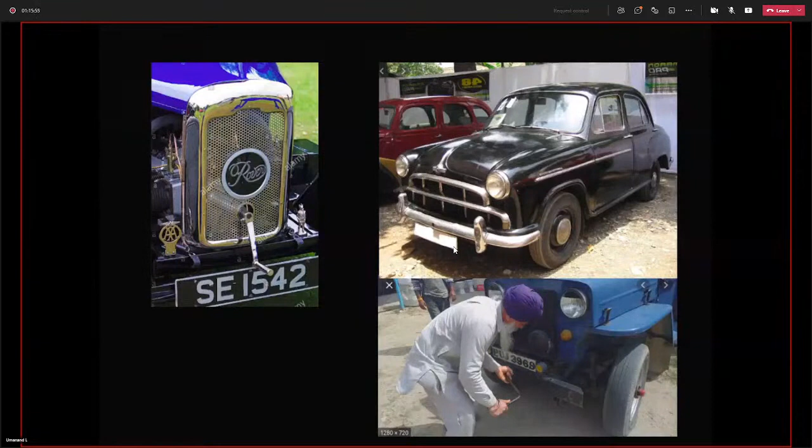But of course, after the starter motor came in, they used to have the crank in parallel, because sometimes the battery is down, you start it with this, something equivalent to a push start, crank it and then start the vehicle and go. But now it is not there. Remember that it is the starter motor which actually won the race for the ICE engine. Very ironical.

Then later on in the 40s or so, you started having these electric vehicles, wedge-shaped electric vehicles with different structures. They had the solar panel on the roof, and these wedge-shaped structures became popular basically again for aerodynamics.

In electric vehicles, you have these main loads. One is the resistance to acceleration, the J d omega by dt, or the m dv by dt - you need to provide enough force to overcome the acceleration. You need to overcome the rolling resistance - the tires which come in contact with the ground, by virtue of its motion, there will be a friction, called the rolling friction or rolling resistance, and it has to overcome that. It has to overcome any gradient forces. And third, important thing, it has to overcome the force of the opposing air, the air resistance.

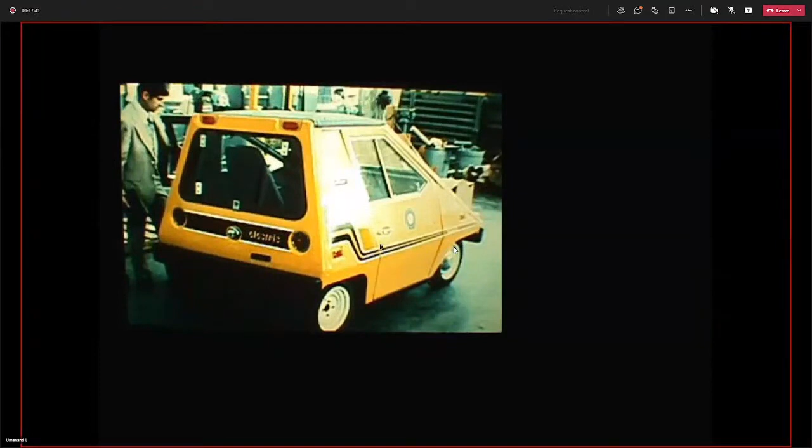So air resistance is actually proportional to the square of the velocity at which you are traveling. Therefore, the air force is quite significant at higher speeds. So these wedge-shaped structures started coming in.

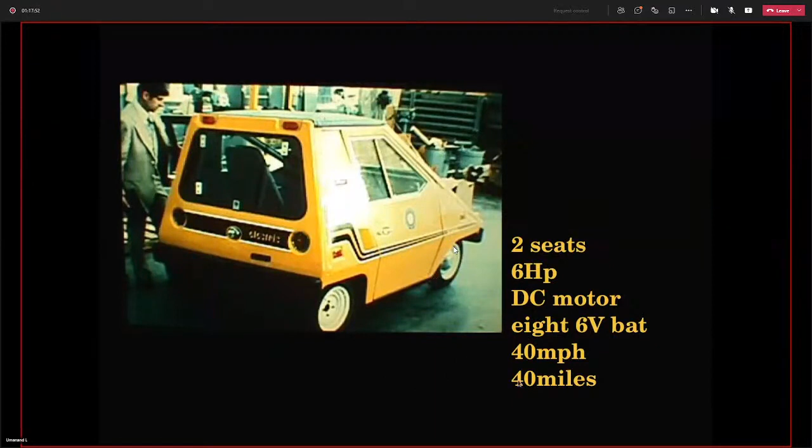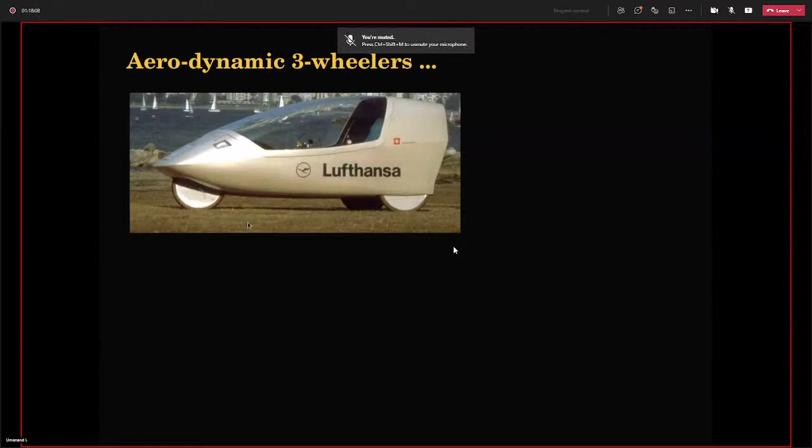This specifically is a two-seater 6 HP DC motor, which could have a range of around 40 miles at 40 miles per hour. You see that there are several in Europe also - several aerodynamic structures started coming into play. These are in that 1950s era.

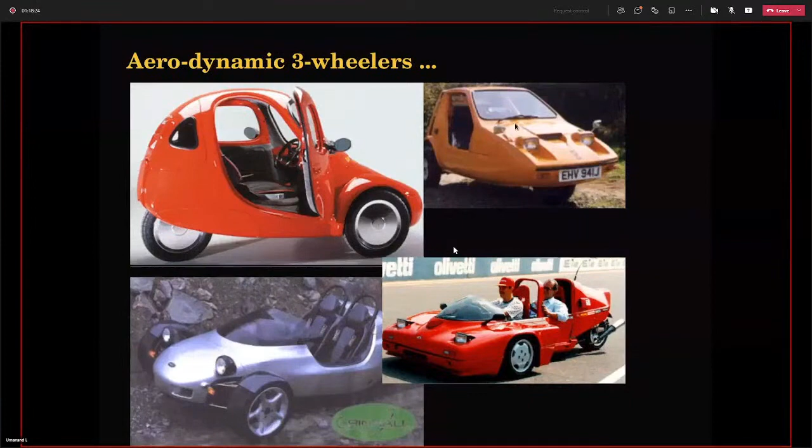And charging was an issue at that time, and it is also at this time. Charging, as we go forward in our discussion, you will see is going to be quite problematic. So instead of the fuel here, you will have the charges, and then you can have metered charges, all those things. So parking lots, parking spaces, can double as charging stations.

Now let us just have a look at this thing. Where does the energy go? So these numbers were actually taken from measurements - we have made several electric vehicles, probably I'll show some demos later, some videos. And the measurement taken for 1 kilometer travel, with the weight of the vehicle around 800 kgs, 800 to 1000 kgs if you include the payload - you will see for 1 kilometer cruising travel, the amount of energy that is consumed is around 80 watt hours.

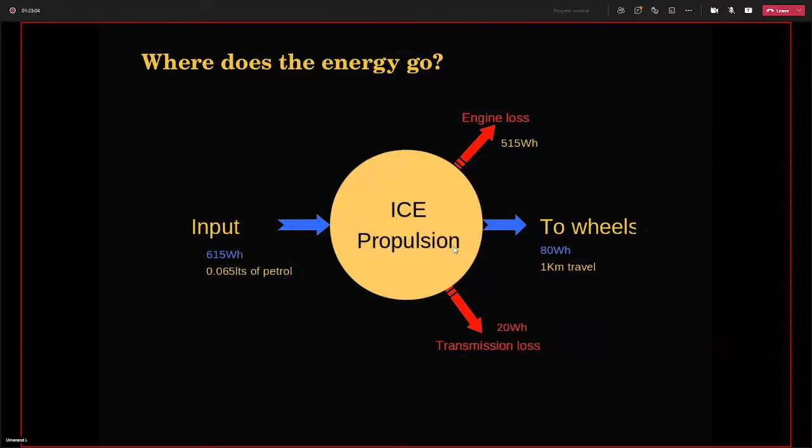So in liters of petrol, you can convert it, it will work out to this much. So this is basically the energy budget - what happens. This is the energy budget for an internal combustion engine propulsion. So let us see what happens if it is an electric propulsion. For the electric propulsion, same weight, same payload - 1000 kg, 800 kg vehicle, around 200 kg of payload, 1 kilometer travel.

This will not change, 80 watt hours. That will be still the same because the payload is the same, the weight of the vehicle is the same. So to that, add the commission given battery charging loss 40 watt hours, transmission 20 watt hours, and that will amount to 144 watt hours.

There is regeneration. So when you are using electric propulsion, you can regenerate. See, normally in an ICE vehicle, when you brake, what happens? There are these brake shoes which will go and press against the brake drum. There is friction, and because of the friction, the vehicle comes to a stop. That is an additional force. The vehicle slows down, decelerates, and comes to a stop. And where does the energy which is stored in the inertia of the whole vehicle payload go? It goes off as heat energy through that friction.

But in the case of electric propulsion, that energy which is stored in the mass of the vehicle, mass of the payload, can be regenerated back and put into the battery, into the input. So therefore, it is actually not 144, it will be around 140. So this is the kind of difference. So the energy that is drawn from the input can actually be significantly lesser compared to the ICE under same benchmark condition.

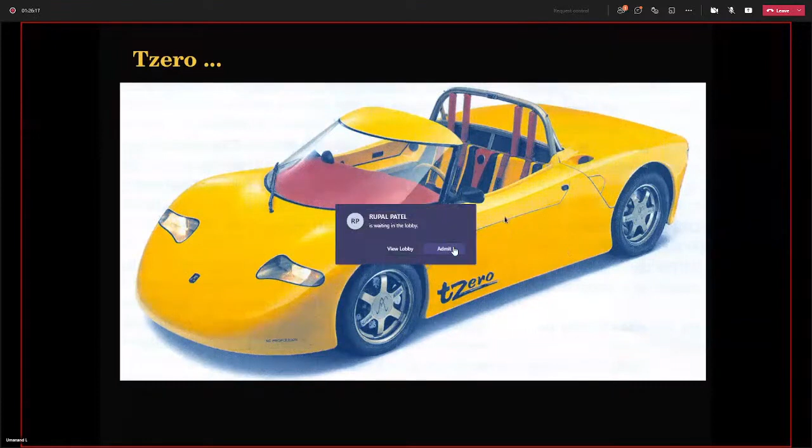I will explain the structure, the block diagram structure of that later.

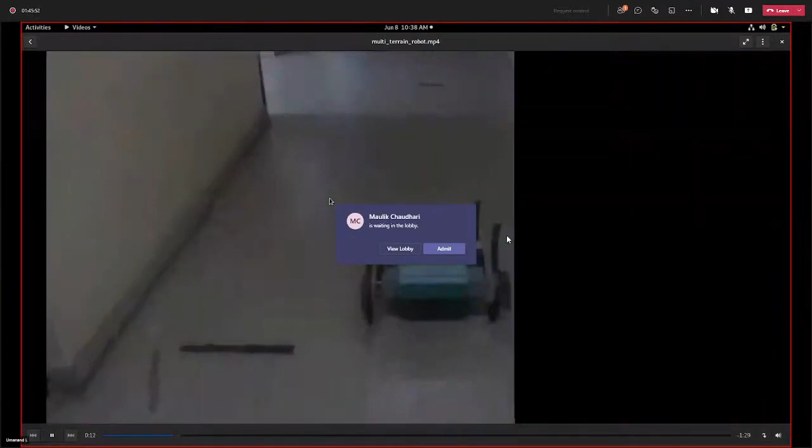Let me show you the next version. So this is the next version. You see that there is a camera there. So this can work on its own, and it can also sense obstructions.

See what's happening, and you can also direct it. So this is a stair climbing robot.

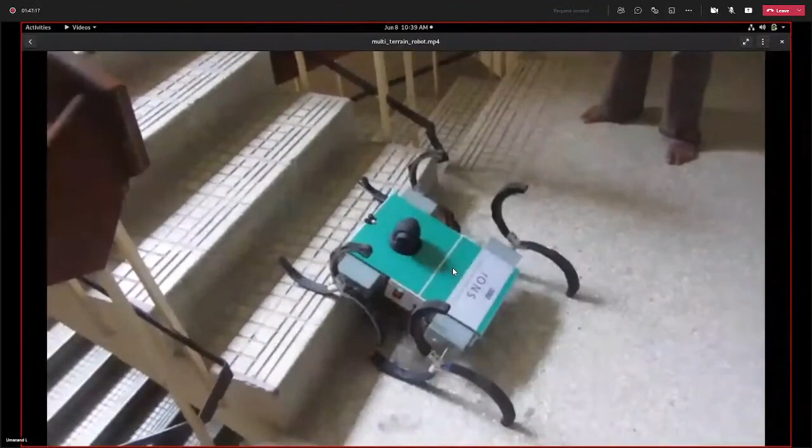This stair climbing, in fact, it was also supposed to not only be all terrain, but also be able to climb stairs. Then it comes down, all by itself. So this is basically one aspect of non-wheeled locomotion, very, very useful.

So when you guys are doing research, that...

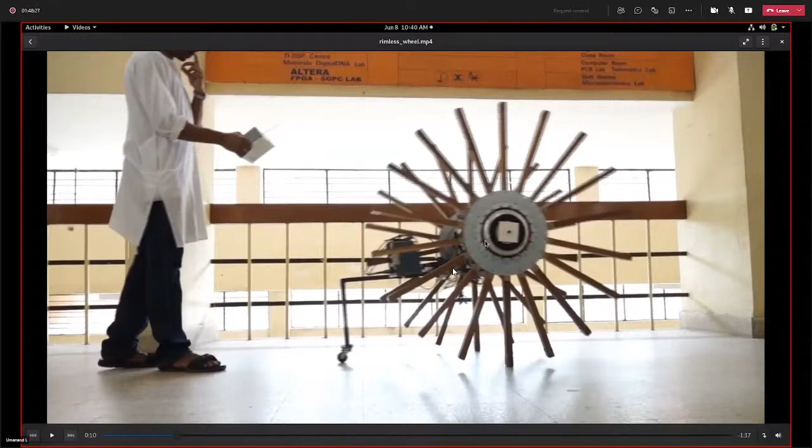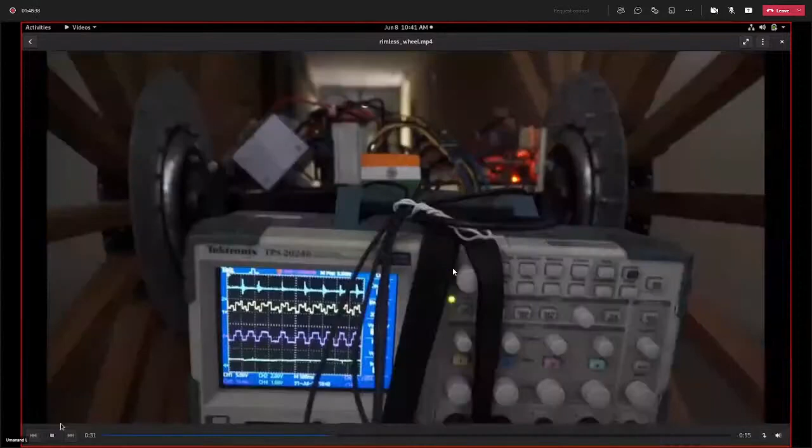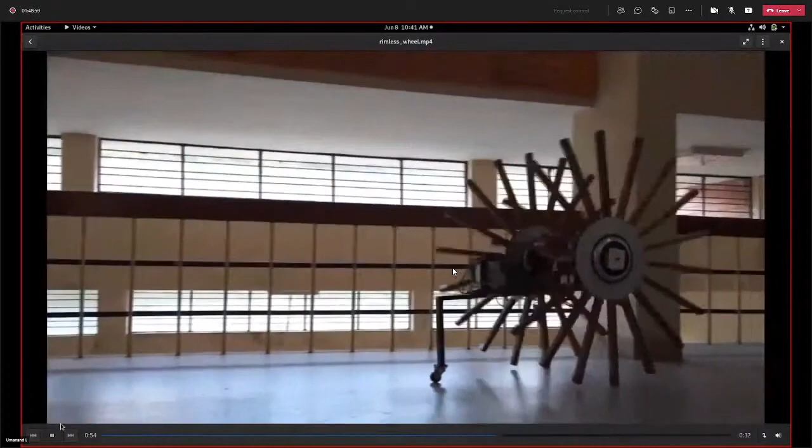This is very similar to your differential drive robot, that kind of a thing, where the differential is basically those two motors itself, operating at different speeds can give you the turning angle, turning radius.

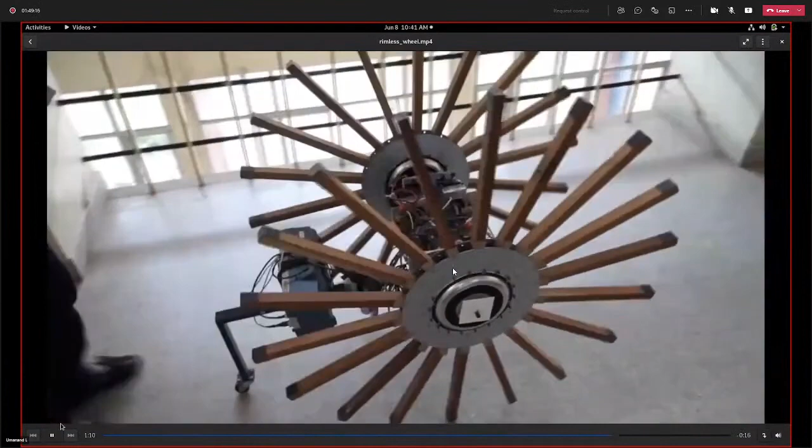This is a rim, the spokes are all made of wood. So we bought these wooden strips and then cut them to shape. And there is some rubber for the feet, rubber anchors for reducing the impact.

Okay, so that is some videos for you. I will close this presentation. I will open another, now this is something else.

Now at this point, let me ask, are there any questions before I go forward? Does anybody have questions till now? No, sir. Okay, let me go forward. If you have questions anytime, note it down so we can take it later, no problem.

So what I want to actually bring out in this slide, you have various energy sources. On the left column and on the right column, you have energy density, watt hour per kg, per kg of this energy source, how much watt hours you get. Look at these.

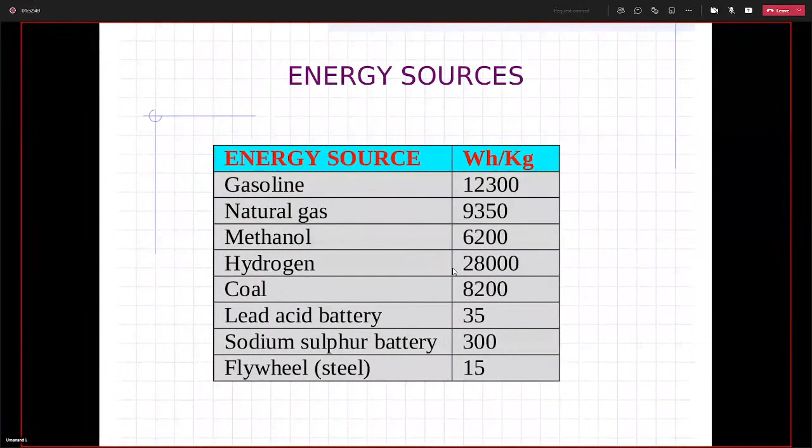So the 1 kg, if I take it in my pocket, the petrol will give you phenomenal range, whereas all these batteries will give you a very short range. This is one important thing that you need to keep in mind. Looking at hydrogen, the 28,000 figure is the one which actually pushed the fuel cell concept, which uses hydrogen for making energy. But one thing you have to keep in mind is that if you are carrying hydrogen, even though it's low...

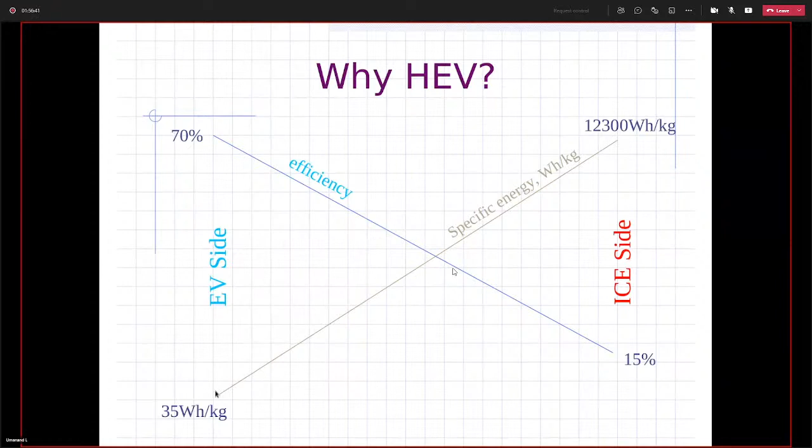So somewhere in between you can have a kind of optimal compromise. If you take the energy density into efficiency product, somewhere in between you can have the optimal compromise, and that could be the percentage. And then probably as and when the battery technology improves, you can start moving towards the EV side more and more until you become fully an electric vehicle, or you reach an equilibrium where you may have to use a portion of fossil fuel and a portion of electric to balance out in the long run.

Remember that when you are talking of this energy, you have to actually talk of the entire energy chain, from the point that if I take petrol, the amount of energy used to extract the petrol from the ground up, and then transport it to the various petrol stations, and from the petrol station it gets into the vehicle. So the energy chain, even from the generation point to the point of reaching the vehicle, is important.

In the case of electric, it is so as well. Is it renewable or is it non-renewable? In a country like ours, you should know that majority of the electricity is coming from... any guesses, anybody? Which is the major source of electricity for our country?

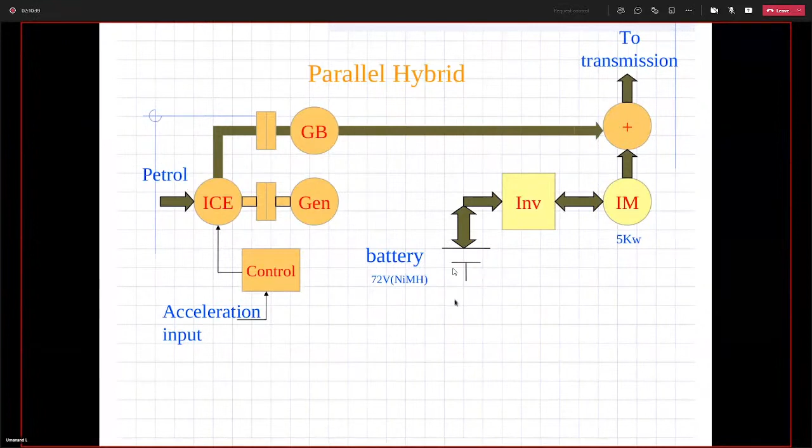And this induction motor is driven from an inverter, from the battery. So this is a combination: one input, petrol, coming into the internal combustion engine coupled to the gearbox, power flowing, and then here you have a torque addition. So battery powers up the induction motor through an inverter drive, and the induction motor goes to the torque adder. It's like two persons pushing the vehicle, these two persons pushing the vehicle wheels. So this is parallel - two persons in parallel pushing the vehicle, the parallel hybrid.

So let me just expand that. I will put the battery a bit downstream, and then you have an interface electronic.

So we have this multi power port. What it basically does is give you three power ports. One is electricity, that's one power port. You have the battery, that's another power port, and then the inverter, which is the third power port in this case.

So you could have electricity from the grid, from whichever socket point you want to take, that can power up the battery. Now from the battery, you can have the power flow through the multi-power port, and it can go into the inverter, into the induction motor, back and into the wheels.

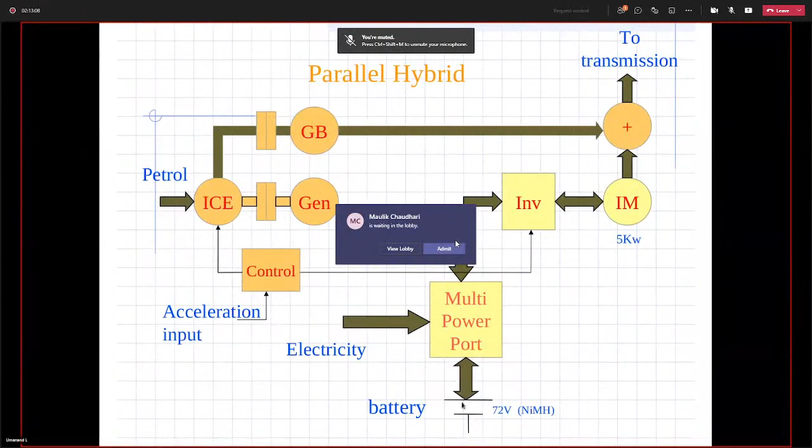But you can recover it back if you have this kind of hybrid. You pass it back to the induction motor, which will now act as an induction generator, goes through the inverter, and through this multi-power port, it will come and charge up this battery. You can recover that portion of the energy which was in the inertia of the vehicle. So that is the important aspect, energy recovery, which is not there in normal petrol driven vehicles, which is possible here. So we call it regeneration. This is parallel hybrid with regeneration possibility.

Okay, so you see the difference now. I am removing this shaft. From the ICE engine, the direct shaft which is connecting to the torque adder is removed. Instead, the ICE engine shaft is connected, coupled to a generator. So the generator is going to generate electric output. The electric output, let's say if it's AC, it's an alternator, you rectify it, and then you place it in this fashion. So this becomes a series hybrid.

This means only one guy is pushing the wheels, which is the induction motor. But the induction motor itself can take power, energy, from different energy sources. It can take from the petrol ICE engine, that's one possible source. It can take from the battery, the other possible source. And it could take from the battery, which is actually taking from the electricity. So multiple sources are there. But as far as pushing the vehicle is concerned, it is one single fellow which is pushing the vehicle, the induction motor. So the entire torque has to come from the induction machine.

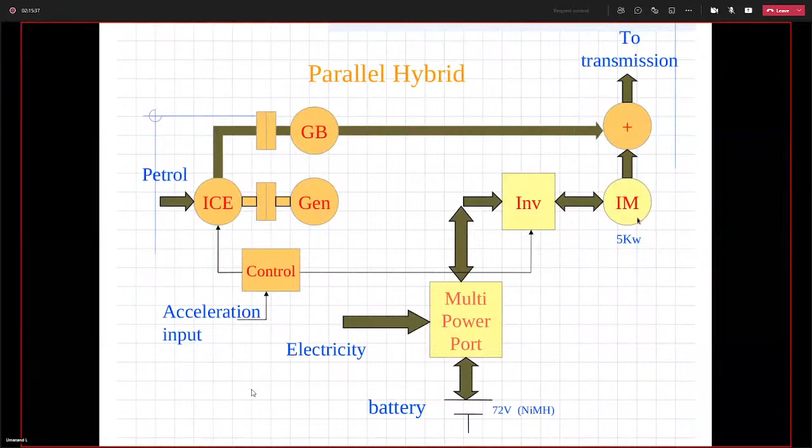So if they are equally rated - if the ICE engine, let's say you have totally 10 kilowatts, you rate this as 5 kilowatts and you rate the ICE engine as 5 kilowatts - then you have half the torque coming from here and half the torque coming from the induction machine. So you can rate the machines half and half. But in the series hybrid, this motor has to handle the entire power, so it has to be rated for the full 5 kilowatts - the vehicle will be a 5 kilowatt vehicle, not a 10 kilowatt vehicle.

And this induction machine can take part power from the ICE engine. The ICE engine can still be half the rating and the battery can be half the rating. And then this part of the block diagram can be half the rating compared to this. The inverter has to be the full rating, the induction motor has to be the full rating. So this is a hybrid concept - series hybrid.

So that vehicle which I showed, that we made, the three-wheeler vehicle, was a series hybrid. This was the topology that was used inside that vehicle.

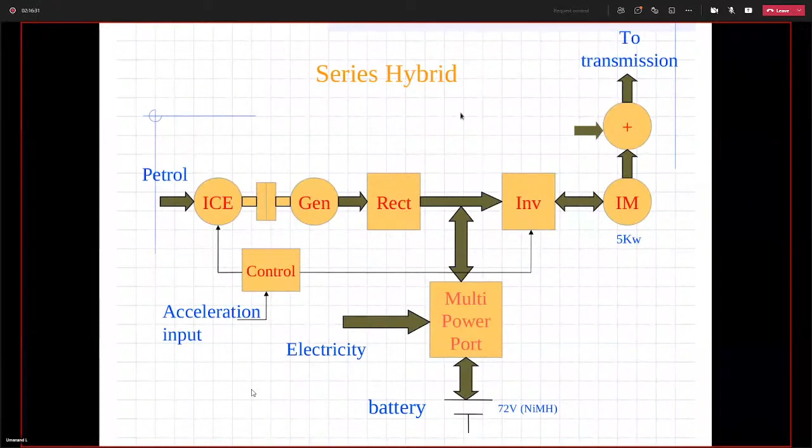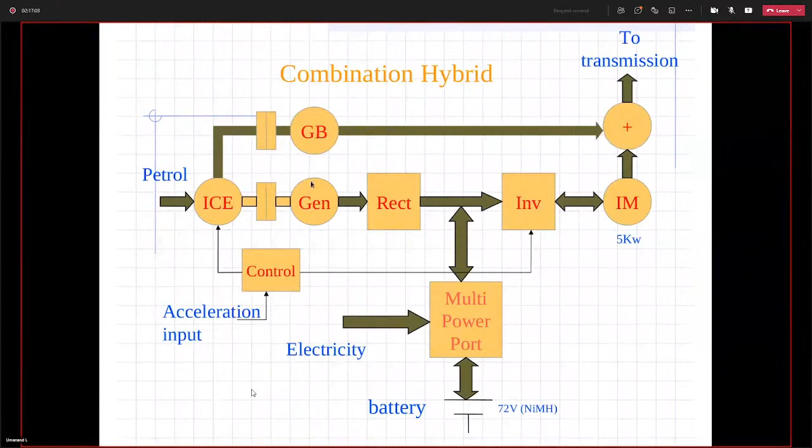So both I will use series and parallel, which means I can shift between series, parallel, combination in a very smooth manner. This is called combination hybrid. This is exactly what is inside the Prius - the Toyota Prius is a combination hybrid. Their nice important component is this: the ICE shaft has a generator and you have the gearbox. This is a very nice combination which Prius uses as a sun and planetary gear system. It is their patented technology, and that is where a lot of their innovative USP is about.

Okay, where you also have torque sharing at the wheels. You also have power sharing at the electrical side. So you can see that you can have several directions of power flow here.

Petrol, the power can flow from the ICE engine. It can go through this generator, gets converted to electrical, rectify, charge the battery. The battery can also be charged from electricity - you can plug into the grid, go through this and charge the battery. You can also charge the battery when you brake the vehicle - then you have power regeneration, induction motor acting as a generator, inverter acting as a converter, goes through the multi-power port and charges the battery. The battery can be charged in different ways.

Then you can have from the battery power flow through the inverter, induction motor, and go to the transmission. This can happen, let us say the petrol is over, tank is empty, so this portion won't come into the picture - this will discharge and push the vehicle on its own. So then it becomes an electric vehicle - battery, inverter, induction motor to the transmission just becomes an electric vehicle.

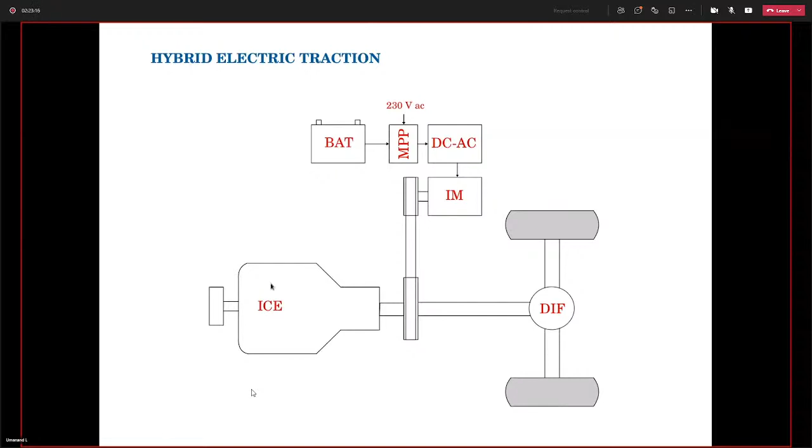Belt and pulley mechanism, and we connect an induction motor in this fashion, and you have a DC-AC inverter, the multi-power port, and then the battery. So typically this is the same block diagram that we are trying to fit to the vehicle. This is the ICE engine. On this side, normally the ICE engine shaft is connected to fans or through another belt drive mechanism through an alternator. That is typically what is done in a regular vehicle.

So if I want to use it as an electric vehicle, the engine has its gearbox, there's a gearbox here, so we keep it in neutral, and then you could use this battery, multi-power port, inverter, induction motor through this pulley mechanism, and then go to the differential and drive the wheel. So it becomes an electric vehicle. Or let us say the battery is not there, I can disable this drive to the induction machine, and the shaft will just free-wheel rotate, and the ICE engine can drive, you can put it in gear and then drive this differential. It can be a pure ICE engine. So you have a way where you can have this parallel hybrid concept possible.

Now on the other side of the shaft, which is normally connected to an alternator, that alternator is rectified and connected to a battery for charging the battery. Typically in every vehicle you will have this. The ICE engine shaft is connected to an alternator, and that is rectified and charges the battery. So when you are running your vehicle, your battery is getting charged - what you call the onboard battery that you are having for doing all the other work for lighting, dashboard, and all those things, right? The regular housekeeping job that the battery is doing. So the housekeeping battery gets charged in this way in all regular vehicles: ICE shaft, alternator, AC-DC, and the battery.

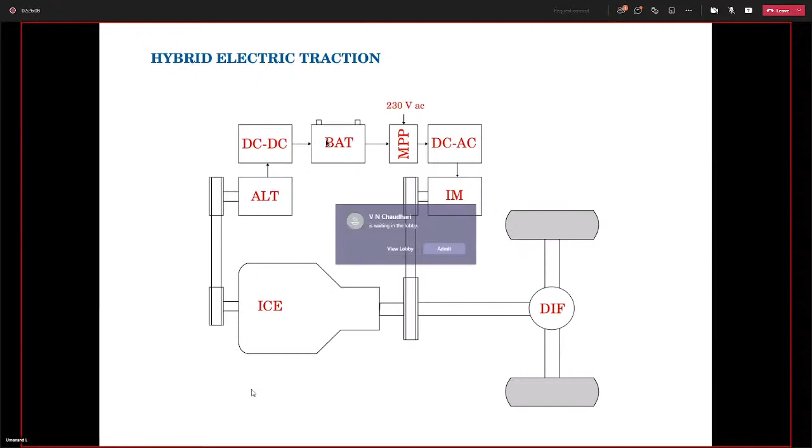It is firing, and the shaft is rotating. It is through the alternator powering up the battery, and from the battery it is going through the inverter, induction motor, and driving this. So it becomes a series hybrid. ICE engine, battery, induction motor, all in series driving the vehicle. So you have a series hybrid. So you see this possibility - you have a series hybrid, you have a parallel hybrid, you have a combination.

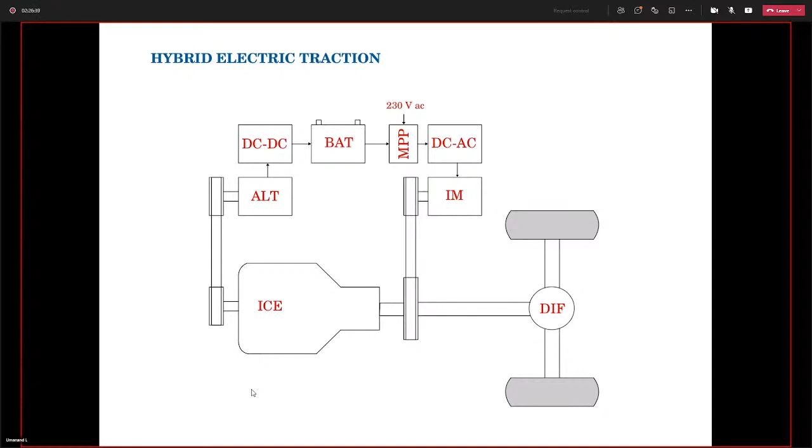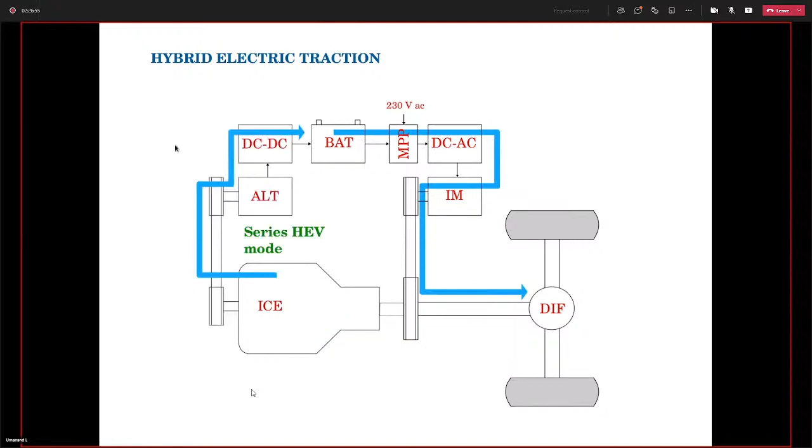So that is the structure that we use, and we try to build it, incorporate it into the van. Of course, it operated successfully, but it was not production-worthy because it was a student project. But anyway, I will show you the picture. So this is the flow for a pure electric vehicle. This is the flow for a parallel HEV, and this is the flow for a series, and then the combination.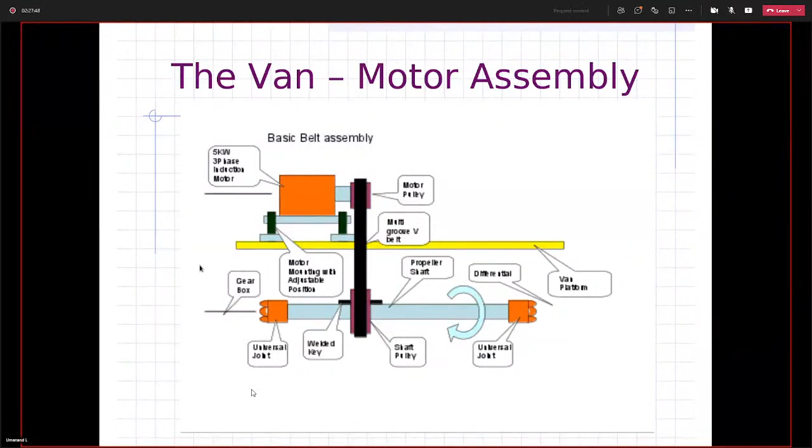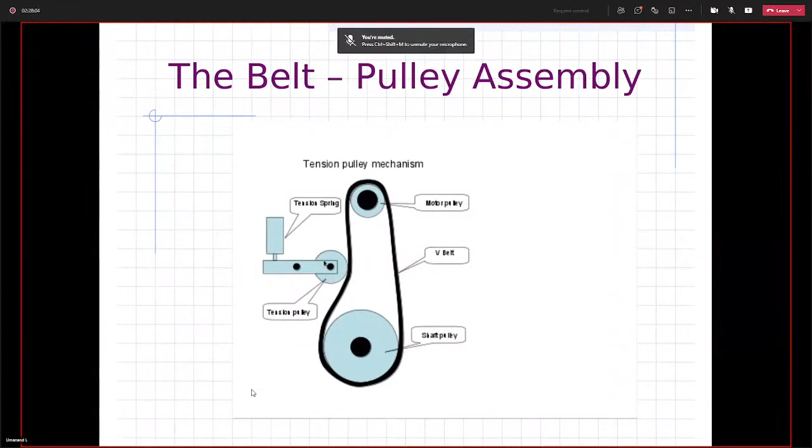So the wheel shaft here comes from the gearbox IC engine side. So this pulley here, you have the motor connected to this, and this is the shaft to which the differential is connected, to which the wheels are connected. And here is a tension pulley, which adjusts the tension of the belt.

So this is the vehicle. You see here, the back side, the seats are removed. Wiring is messy, of course, it is a student project.

So this is the inverter. And the inverter is here, and this is the multi-power port, MPP, which is charging the battery. Batteries are in these wooden boxes, and you have the inverter here driving this machine motor. And this machine, you see this belt going down, and there is this tension pulley.

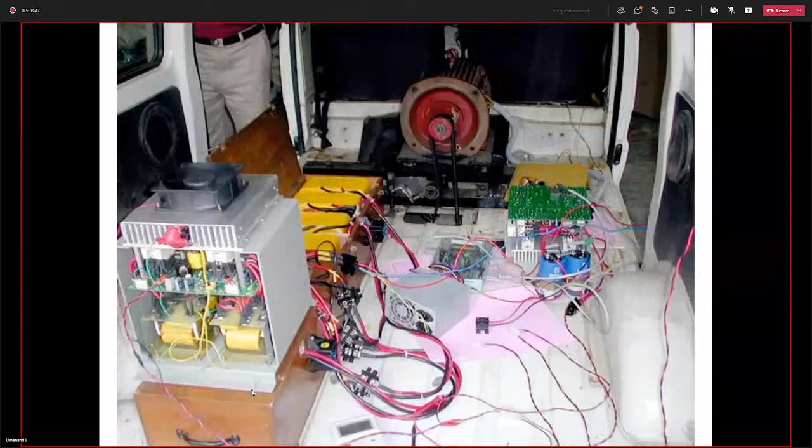Probably I can show here. Yeah, the motor. There is. Pardon me. Yes.

Okay, so here this box you see is the TMS 320F2407 processor. The 2407 was the one which was the latest in release, so we used that one. Of course, now you have the 28X series, which are more popular.

This is the inverter. So this was the vehicle which we tried and tested as a retrofit van, as we call it, Maruti van.

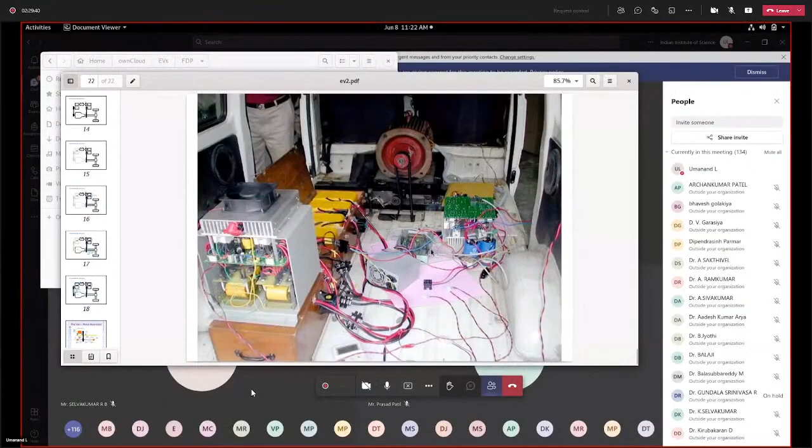Okay, so now I will move on to another segment. Any doubts up to this point?

Sir, Umanand sir, you can hear me? Yes, I can hear. Sir, that alternator which was there, in that block diagram you have shown, was that a single phase alternator? No, it's a 3-phase alternator. You have a 3-phase rectifier if you have a charging battery. Yes, thank you sir.

So now I will continue, and move on to challenges. There are several unsolved problems, so I don't have a solution for everything, but I want to raise these challenges, and this is where a lot of work will be done. I presented the history, and the second part was what was done: series parallel hybrid combination, what is done, and what is proven, the technology proven. But in this segment, several aspects are not clear, in the sense of how it will finally get realized into a commercial concept. So there are some technologies which are there, but not yet at the field level, maybe at the lab level. So these are the points I want to make, which will probably trigger your minds, and you may come out with better inventions along these lines. So I'm continuing in that mode.

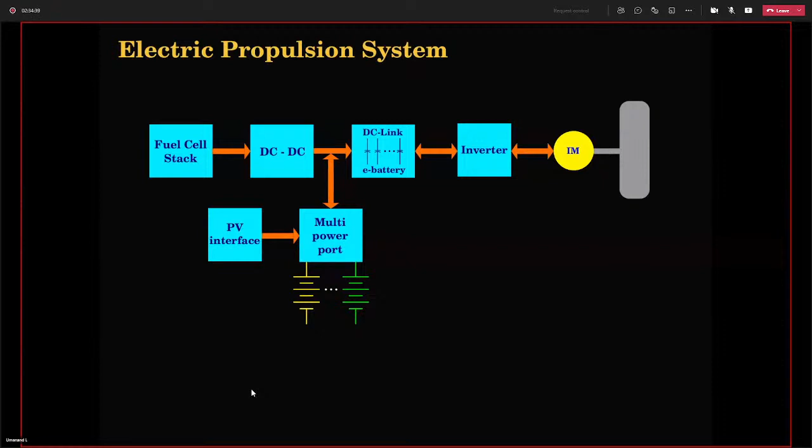Then PV interface. This has to start coming in more and more. You see in stations, rooftop PV will come in. So PV interface to the multi-power port to charge the batteries should start coming in.

Now grid interface, slight difference. You want to charge the battery, therefore you need a grid interface converter coming from the mains. But I have shown them as bidirectional arrows. What does it mean? The mains is normally supposed to charge the battery and put energy into it. Why should I have a bidirectional arrow? Why should the battery start putting energy into the mains? Any guesses?

To support the grid during grid requirements, say reactive power, active power support.

Yes, see, now this scenario will come. This is a very, very critical scenario. Understand this, this is something that is going to come. If I have one or two electric vehicles on the road, there is no problem. But let's say you have 100 million electric vehicles on the road, then the grid is going to face a serious problem. Take human practice: you come home in the evening and put it to charge. So all of you are going to come home and all 100 million vehicles are going to plug into the grid, and suddenly you will see a fantastic fast dynamic load coming onto the mains. What will the mains do? It will become unstable because it also has to deliver our regular supply, for which itself there is power cut, plus there is this new kind of loading beast now coming onto the grid.

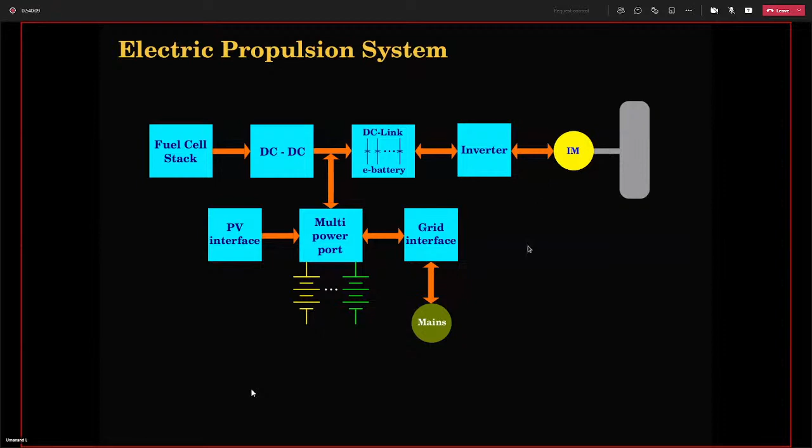Otherwise, the grid will go unstable, and this charging scenario won't be possible. This is something you need to take care of, and it's a challenge. This hasn't been solved effectively yet, but it is coming. It will come.

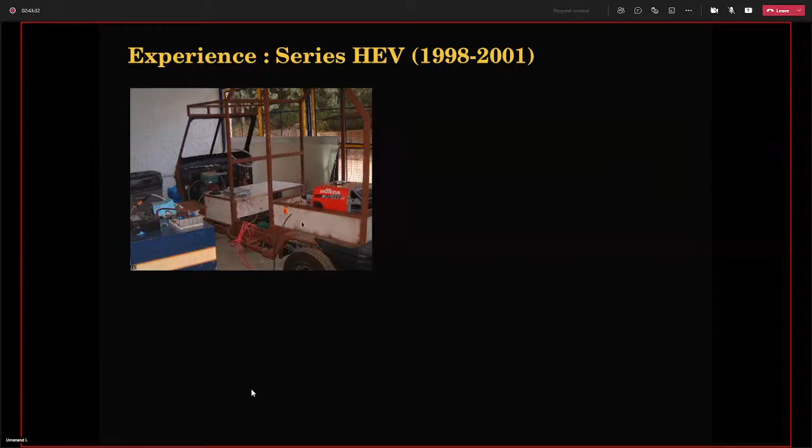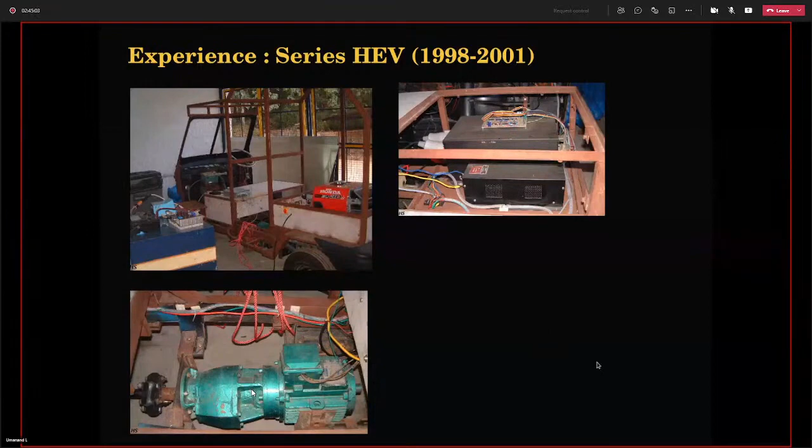The reason we prefer induction motor is that it does not have permanent magnets, and induction motors can be repaired and maintained by several people in the country—there's no dearth for that. Permanent magnets are a problem because we don't have the natural resources to get them. In fact, the majority of those resources are concentrated in probably one country, and 98 to 99% of that is controlled by one country. So if you base the entire transportation system of the country on permanent magnets, you can be held to ransom. So my choice would be either an induction machine, a synchronous reluctance machine, or a synchronous switched reluctance machine—one of these would be a good way to handle the prime mover problem.

So these were coming to the electronics—I wanted to show that this is a previous version DSP board. What's used here is the 2407, and what was used in that 300 kilowatt inverter is the 28X.

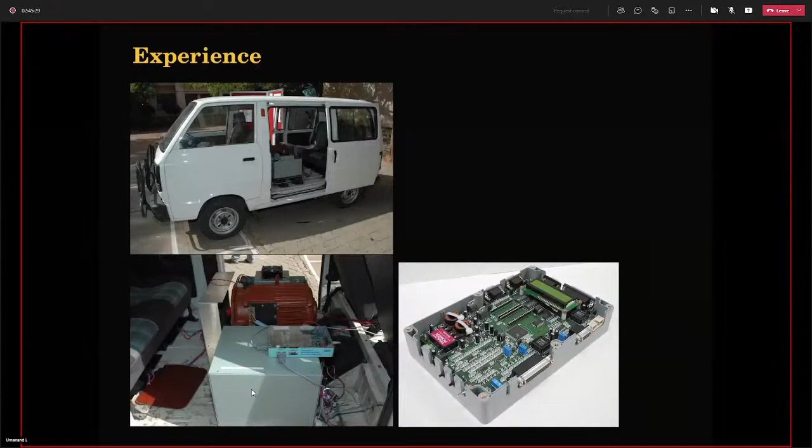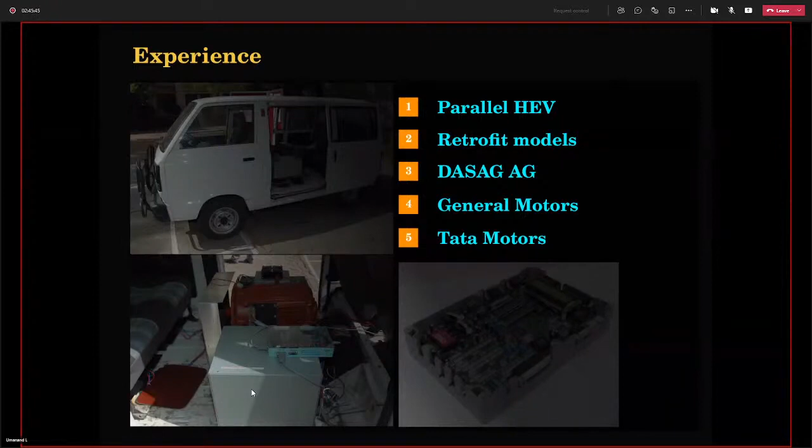There are parallel retrofit models you have to see, and then you have to interact with industries, because a lot of the real spec will come from the industries. Tata Motors is pretty forward in trying to interact with academics, so you can really go ahead and try to interact with some of these industries.

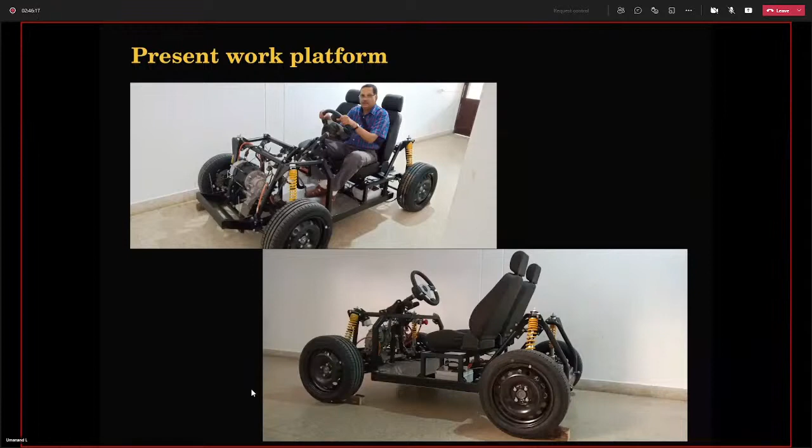In this present platform, I will show some videos on this later. This is the motor, but somehow we are not happy with this motor. We are now putting another motor to fit into that slot there.

Let me bring about the several research challenges. You would have seen that it is all in different disciplines, so I thought let me collate them into different disciplines and then propose different challenges in each. If I take EV, you can see it having a propulsion line. Propulsion itself is expertise, recharge solutions and expertise, security solutions, control algorithms, body mechanics - these are all sets of expertise. Communication is a big thing in EV, safety solutions, IoT systems, storage. So these are all several things that are hitting you at the e-mobility aspect. It's not just making the vehicle drive and take it for a round - you have to build an entire ecosystem for it to come onto the road.

In the propulsion area, I put this in green in the sense that it is reasonably mature, because people have been working on it for quite some time, and propulsion - even Toyota Prius - has come to commercial levels. So you have pure electric, series hybrid, parallel hybrid combination, and retrofit.

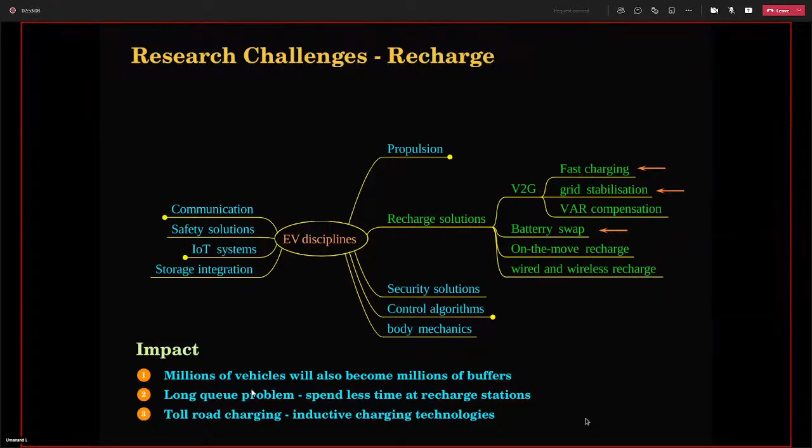No proper solution right now exists, but we know these are things that can be solved. Control algorithms: you have autonomous steering, assisted steering, platooning, remote platooning, smart path mapping. This means some amount of steering control needs to be done.

Why? When you're traveling on a highway, majority of accidents happen due to driver fatigue. He will doze off while driving at a constant speed. The driver has a tendency to doze off, and that is when accidents happen. So that is when assisted steering should automatically take control. You sense the inactivity of the driver through IoT devices, and then the control mechanism should automatically hand over control to the automatic mechanism. A lot of accidents can be avoided. That is where autonomous and assisted steering comes in.

Platooning is another application where you have one driver and several lorries or trucks being dragged together wirelessly, connectionless dragging of these platoons, where they all autonomously follow a leader kind of approach.

You also have applications in traffic signals where you have to stand through two or three sessions of traffic cycles because of large traffic, kilometers of traffic length. If platooning is done, as you start coming into the traffic signal zone, the traffic signal can take control automatically and synchronously move the vehicle. It's not like one vehicle starts up, and by the time that wave reaches the one kilometer level of traffic, the next red signal would have already come. So if synchronous remote platooning happens, cars will cross traffic zones much more easily.

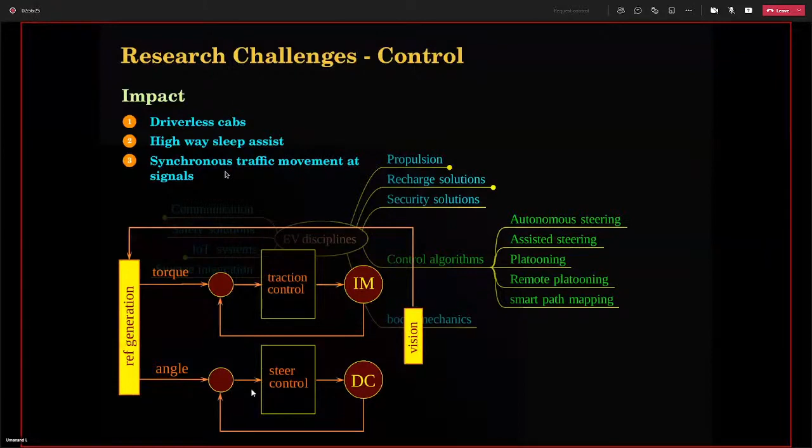For this, vision has to be provided. Over and above that, to map and go from destination A to B, route mapping and all those things, you can use other sensors. So driverless cabs, highway sleep assist, synchronous traffic movement - these are all the impacts you will feel in society immediately when these challenges are addressed.

Then communication. As I said, this is again a very important area with significant challenges, both intra-vehicle communication and inter-vehicle communication.

Power line can be used for intra-vehicle communication, which is coming up in a big way, and which can also monitor the health of the vehicle. In inter-vehicle communication for collision avoidance and platooning, the headlights and rear lights are used for communicating wirelessly in an optic way. That is also coming up in a big way to communicate between vehicles.

So the impact will be in the ECU, electronic control unit. You have inter-vehicle distance and collision avoidance. These are impacts that you can see, and car, bus, and truck highway platooning, where communication plays a major role.

Now, IoT systems: you have the smart windshield. This is an innovative thing which can make a big impact. Especially in night driving, when a car is coming from the opposite direction, the glare of its headlights can really affect you. That is where smart windshields become very useful - they remove the glare through image processing and present a much more pleasing picture to the driver.

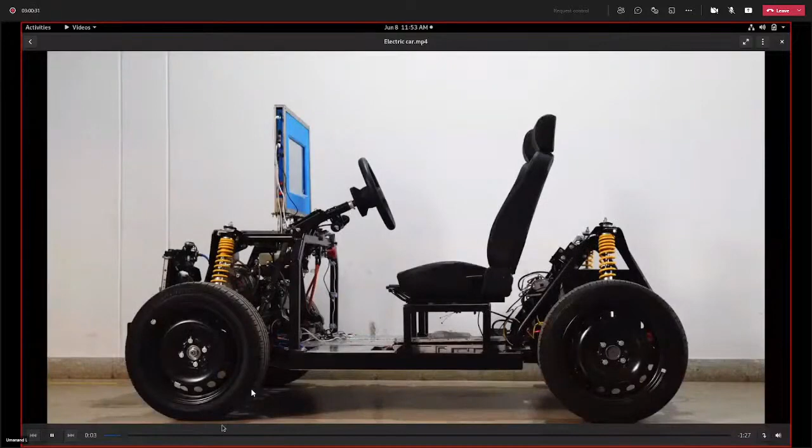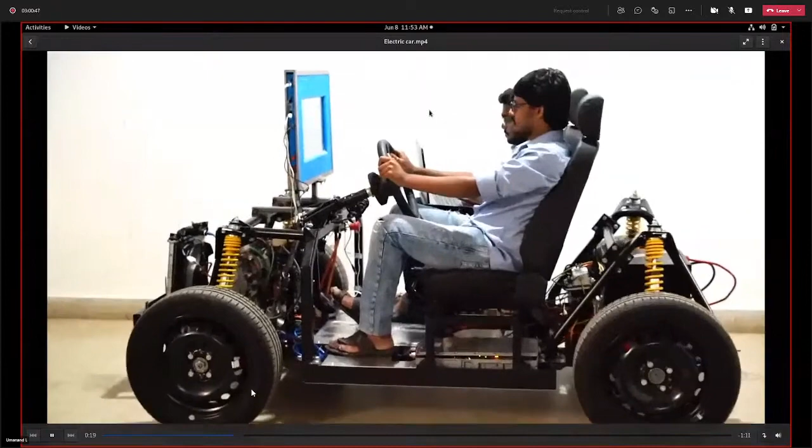You see this portion - this is the smart windshield. The other drive portion I explained to you before. The smart windshield, as I said, will come - it is translucent, it can be opaque, it can become transparent, and you will see on that screen what is actually appearing in front. So that is basically the effect: what appears is passing through an image processor and appearing on the front screen, and because it passes through an image processor, you can manage glare effects and things like that. This is at a nascent stage where we have taken two LCD screens and tried to play around with it, but this can become a major factor, especially in avoiding night accidents.